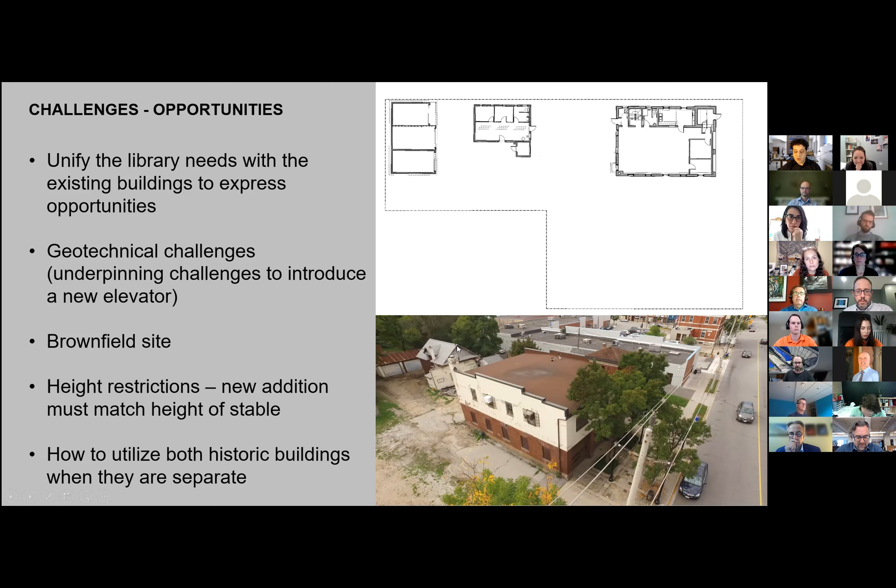From accessibility, putting in a new elevator with soils that were really unstable - we had monitoring the whole time to do that - it was a brownfield site. The Windsor Heritage Committee had imposed, and I think justifiably so, a height restriction that wouldn't exceed the height of the stable. So there were a number of challenges on how to do this.

From the design standpoint, the biggest challenge was how do you fuse these two buildings from very different time periods and materials together. After much deliberation, this is one of the sketches that resulted. You can see this is from our archival documentation, so this isn't the building as it is now, but as it was when we documented the site.

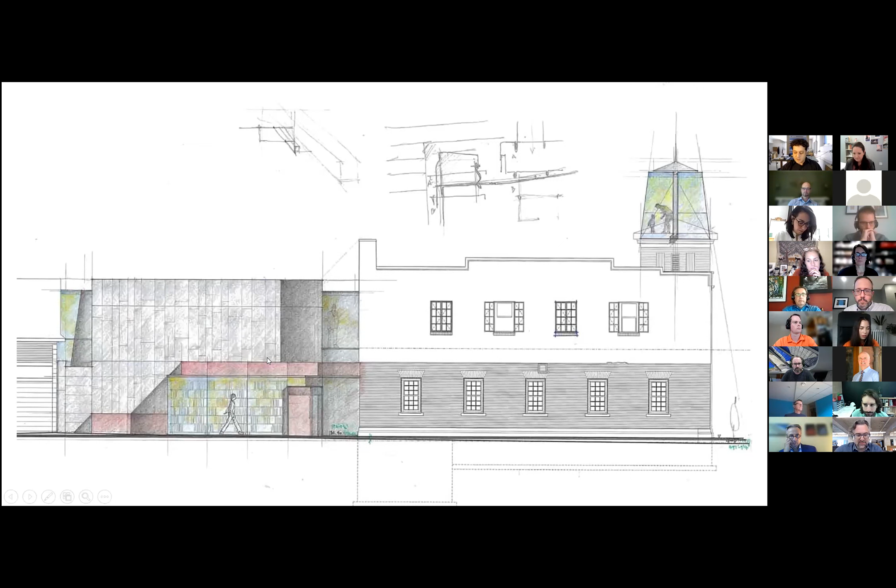I don't know if everyone's aware of that, but the intent here was to try and extend both buildings into the chasm of space, to pull the fire hall in one direction and the stable in the other direction. So the logic was to pull the masonry forward into the site, deal with the monochromatic scheme of the stucco, and from the stable standpoint, pull that polygonal geometry and extrude it into that chasm - that's what gave us this geometry of this light-filled space at the top.

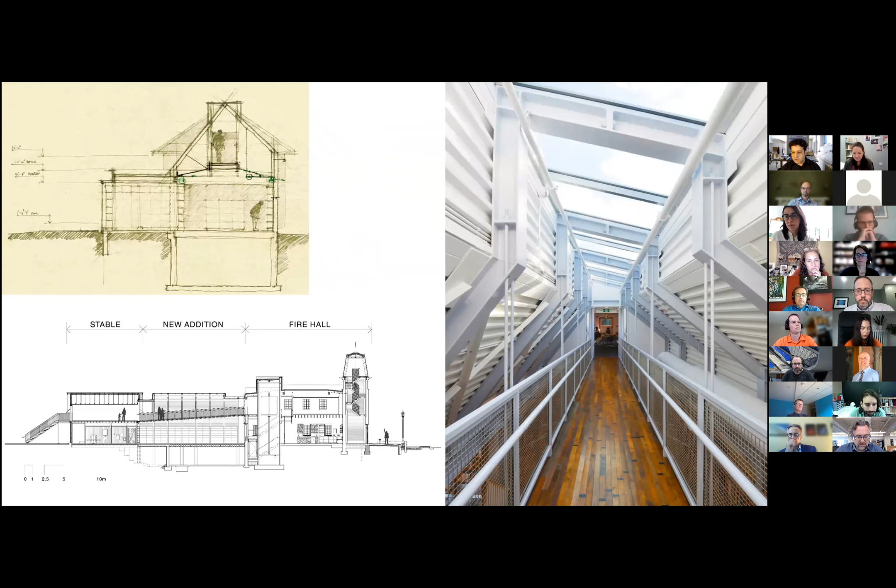As you can see here in the section, here's the stable and the fire hall, connected by this bridge that would act as a sort of light baffle for the collections below. It was about finding a language idiomatic to the two buildings that could materialize into a new structure. The other challenge was prominence, because the fire hall building was very prominent.

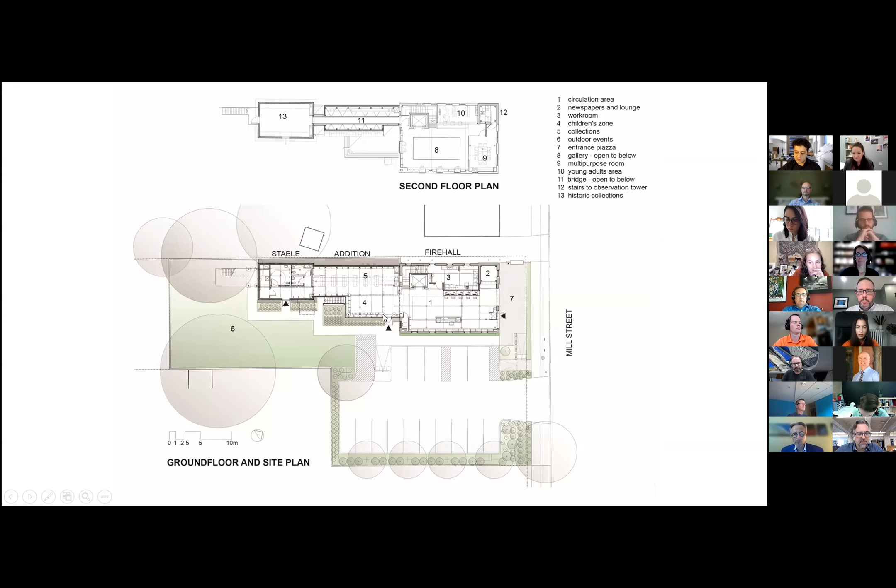The stable receded, so the geometry of the building bounces toward the stable to try and allow these buildings to speak without any dominant element. It was really a kind of balance all the way through.

I don't know if anyone knows Windsor, but Windsor is new to actually caring about heritage buildings. Unfortunately, we've decimated much of our heritage stock. This was a significant municipal project, and the decision was made from the beginning to make this a didactic project. This was the one time we were not going to hire trades from out of town to do it. We agreed to teach the local trades how to do things.

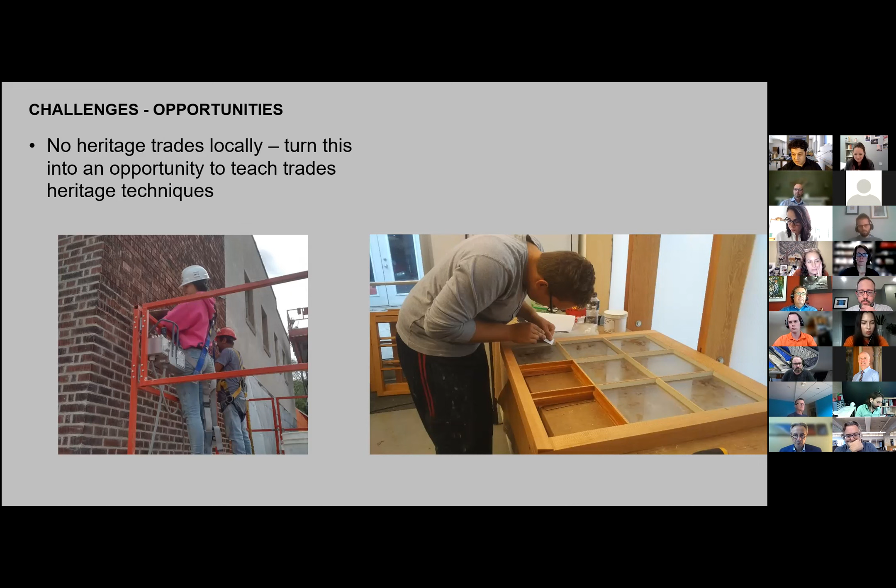This included repointing masonry, but also doing a pebbled mortar technique which hadn't been done here before, and collaborating with our carpenters at the local college, actually teaching them how to make the windows. It was myself and another architect literally there training them how to do it by hand, the same way it was done originally.

This project had projects within projects. One of those was the tower itself. As I said, there was no vertical marker or statement anymore in Sandwich, and it was really a desire from everybody in the town to bring that back in some new way. Obviously it wasn't sound, but in this case, it was light.

We have a kind of a tower within a tower project. The existing masonry, being very stiff, couldn't handle putting something on top of it, otherwise it would have to handle the same sort of stress, the wind load and such, and couldn't handle it. So the solution was really a sleeved tower within another one.

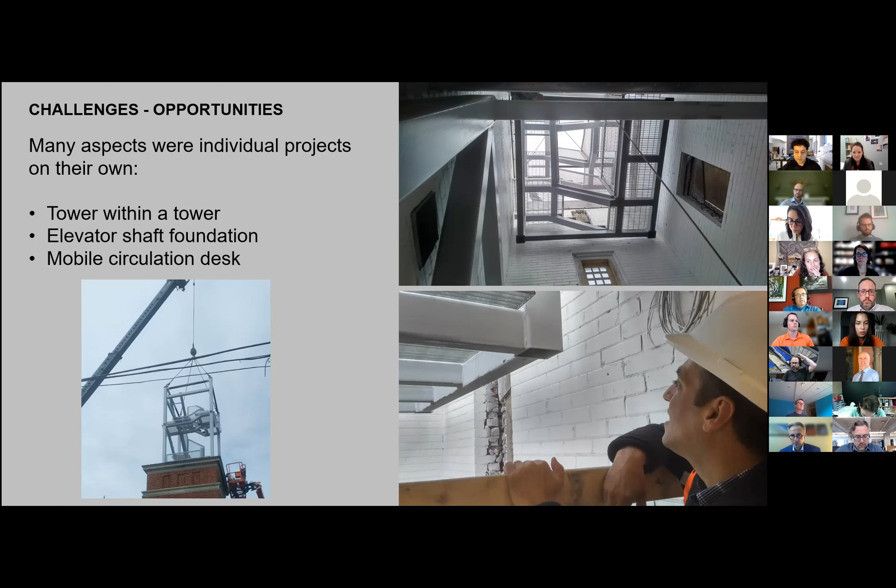The interior is what materialized: a very open, interconnected space, light filled, where from a security standpoint everybody can see everybody, but it also becomes a kind of gathering place for everybody. This space is often used for performances.

Inside the addition, we have that one piece of the library that can identify as a place for books. We did it in the children's area so it would be whimsical and fun, where the books became a sort of screen where light could come through.

And this is the sort of effect in the old fire hall. As I said, it burned to the ground on the upper floor. We were able to preserve one of the charred timbers that was hidden inside the building and expose it.

Since it's been completed, it's really been well received. It's probably the most visited, prior to the pandemic of course, library within our library system. It opened with over 300 visitors, and since we had the fire guys there, they said it was okay that we exceeded the occupancy. Since then, prior to the pandemic, we've had well over 200 visitors per day at this library, and it's this fun place that people can run around, especially the bridge.

Kids love to run down the bridge, and it's a great place for performances. So we've taken a building we're very proud of. We've taken basically something that we were really not proud of, and the fact that we hadn't done something. The city has made a statement that this is a different page turn, and heritage is going to be of significance for us from now on.

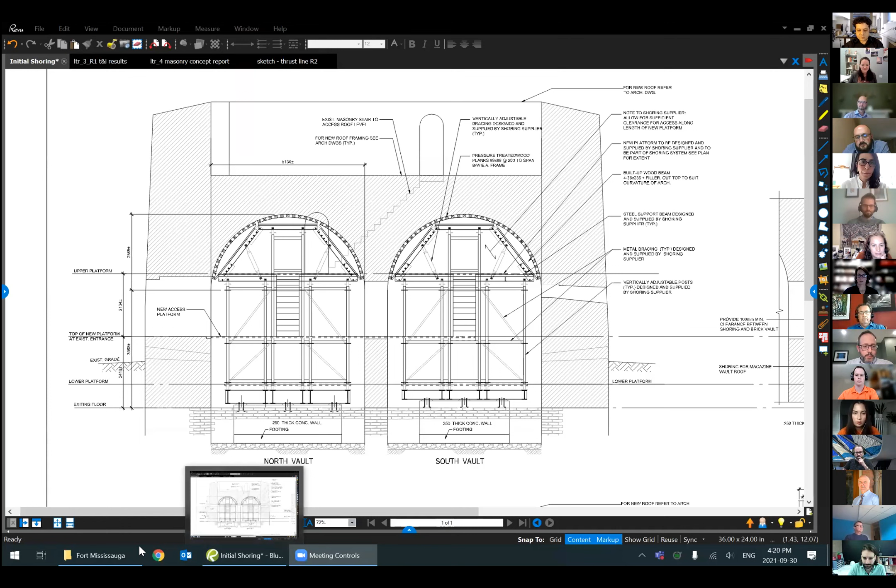In terms of context, this is a fort. I believe it's the only remaining star-shaped earthworks fortification from the War of 1812 that exists in Canada. It was built, I think, in 1814, and it's right across the river from Fort Niagara on the American side, right at the mouth of the Niagara River, where it meets Lake Ontario.

Fort George is nearby, and that's the site that's much more well known to people and frequented by tourists. This one happens to be in the middle of a golf course, not very visible or accessible from the street, but it's all quite original—a lot of the original materials are still there—and it's a very interesting site.

This is the way it was when we found it a few years ago. You can see it's actually been reclad, and they put on parging in the past. It's been reclad with brick, we believe, in the 20s or 30s. This was an active military site, certainly through World War I, and I think including World War II, where it was a parade ground for the Canadian military.

So it was fairly neglected, unheated, no windows, exposed to the elements, and a little bit forgotten about. The roof was in very poor shape.

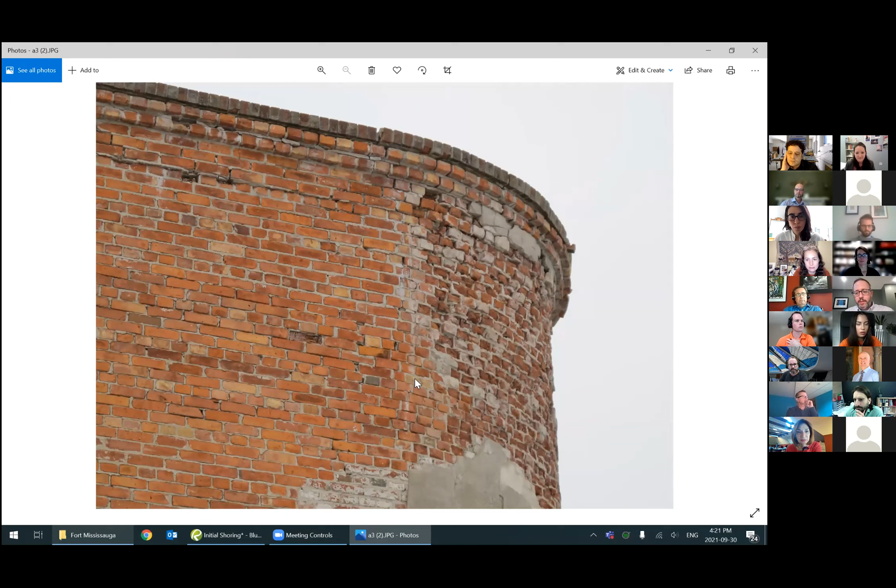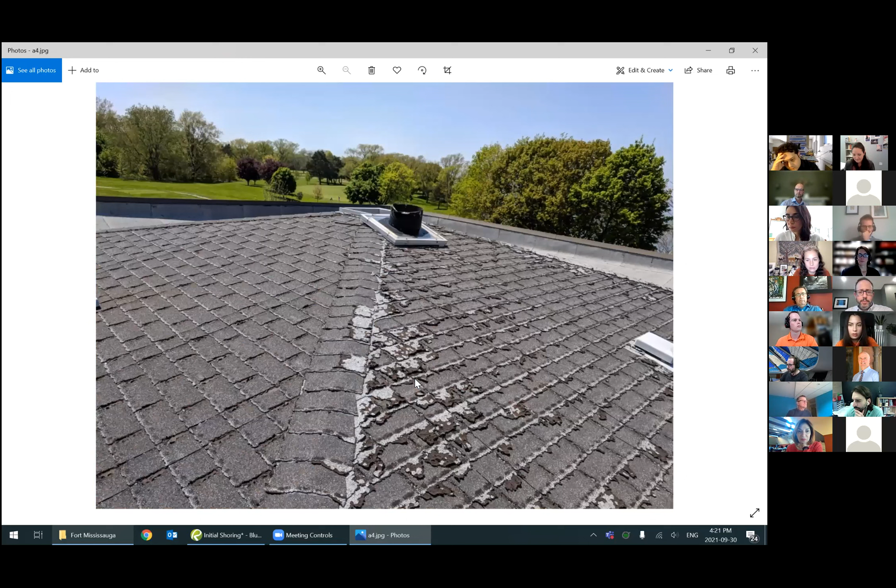As you can see, the corners and the upper courses of the brick masonry were in fairly poor condition. There's the picture of the roof—there's not a single tab left on these shingles.

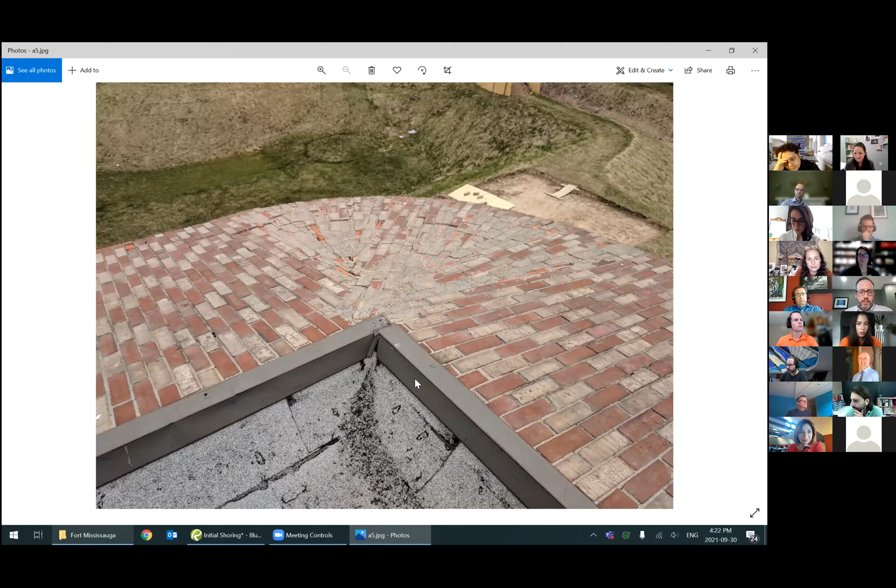And the tops of the walls—it's hard to see in the photographs, but these are 7-foot-thick brick walls with a rubble stone core, all exposed at the top.

There was a back slope on the parapet away from the top of the walls, leading to drains that went through the wall. They always froze up in the winter, and all the water was basically being poured into the masonry inside the walls.

I remember being in there to do some investigation—it had rained the day before, and it was still raining inside the building the next morning.

It was hard to get images in there since there was no light initially, but it's a fairly interesting space. From the inside, you just see there are 2 brick arched chambers, and the plaster is still hanging on in some locations.

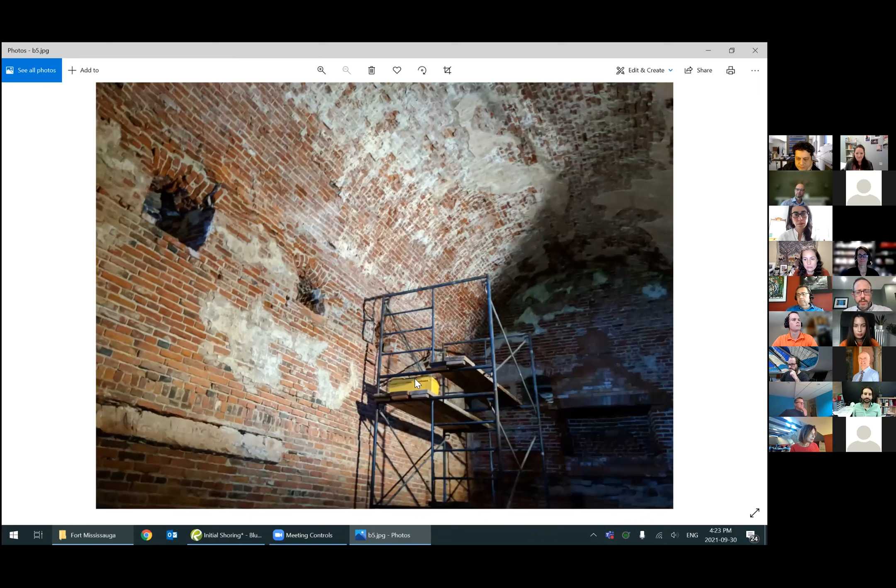But in other areas, the masonry is fairly badly deteriorated due to freeze-thaw. One example of that is along one wall where about 8 inches of brick is no longer in good shape—you can really see it where it slopes back away from the scaffolding. So, in fairly poor condition.

We were actually brought in as a sub-consultant, and our initial goal was to value engineer a shoring system. There had been 2 previous consultant teams that had gone through here, and the intent was to effectively shore the entire building.

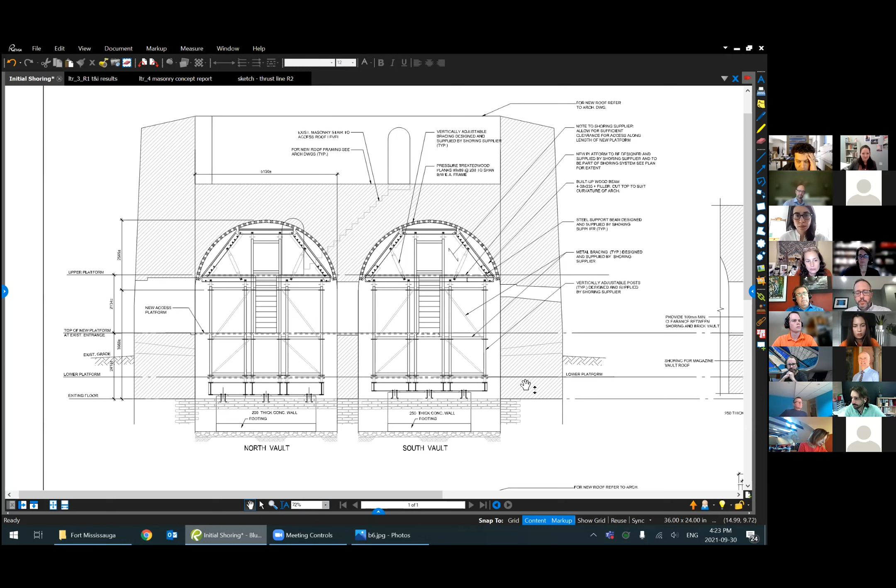You can see this is all wood lagging on new shoring systems, on concrete footings, with steel framing—quite an extensive shoring system was proposed to go in there. Our stated goal was to value engineer that shoring.

But we started out with some investigation, since based on the previous reports we didn't know things like the thickness of the arch, or what condition the arches were in, since there are 2 of them. So we set up scaffolding for investigatory openings to get an idea of the composition of the walls.

Interestingly, there was a lighthouse on this site prior to the War of 1812, and it was the first lighthouse on the Great Lakes. They believe that materials from the lighthouse, which was stone masonry, were actually incorporated into the fort—and it is a rubble stone core, so quite possible.

Since we didn't know the thickness of the arches, we cored it in a few strategic locations to get an idea not only of the thickness but also the composition. Over at the haunch of the arch, we wanted to see whether we'd come across a consistent top level for that arch, or whether the haunch was filled with brick or loose material.

We also excavated to the tops of the arch from above in the attic space, after the archaeological team had cleared it, since the floor in this space and the gun deck above are both archaeological or sensitive areas. There are some more images of coring right at the crown of the arch.

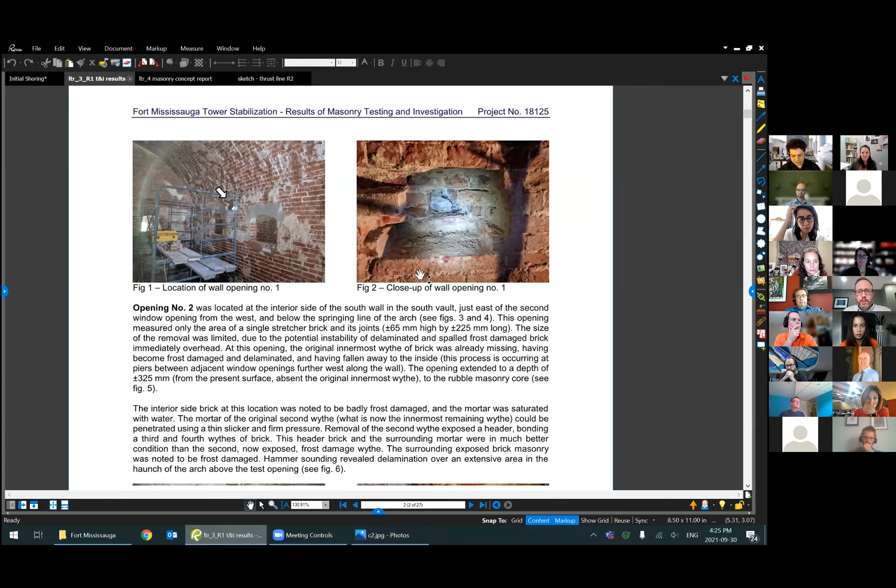So I'll just go through this. These are our, actually, this is a good one. You can see varying wythes of brick, thick to a rubble core, and that ranged from 1 brick thick to 4, and then we effectively...

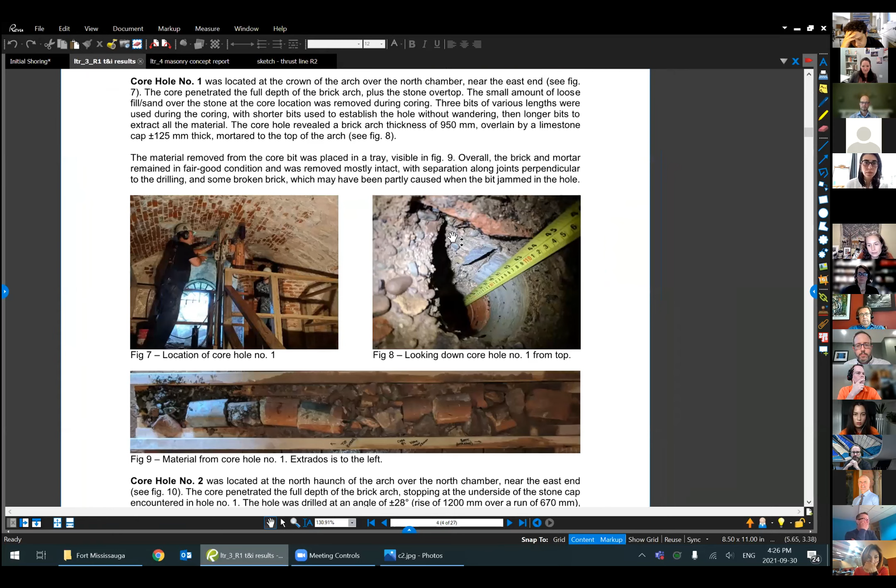Having determined this, here's an image of the core. This one didn't hold up so well. Others were better. But having determined the overall thickness, we were now comfortable proceeding with an analysis of the arch to see just how much it needed to be shored.

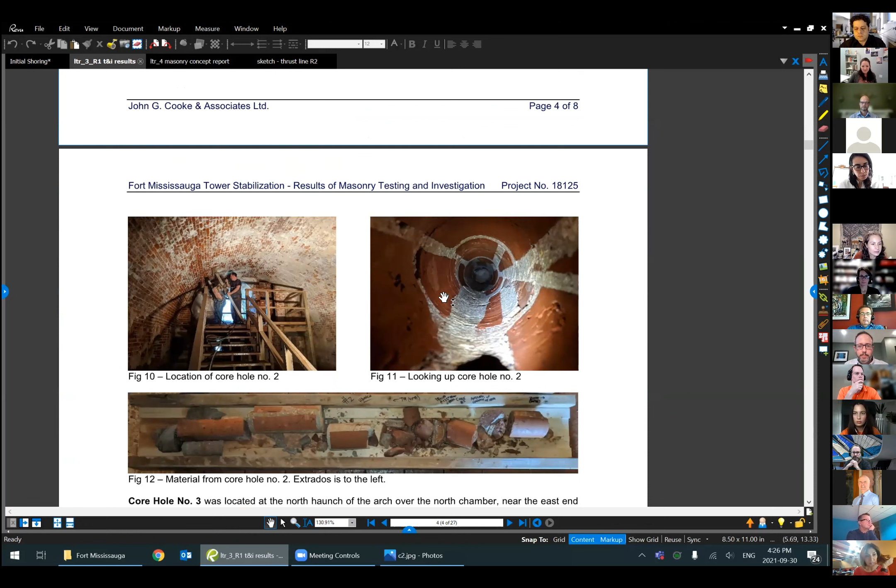Back calculating the previous design, we were able to see that they were effectively thinking they needed to shore for the entire weight. It does look quite bad from inside, but looking up the core holes, there's quite a bit of intact masonry. There's some lines, but where it's debonded, overall, not in too terrible a shape.

So this is our test pit in the attic. Anyway, from that, we tested the mortar, we tested the brick materials as well. We did a petrographic analysis on the mortar to see what the components were.

And then we moved on to analyze the arch. I don't know, in my career I haven't done this a whole lot, simply because usually arches are not, you're not using arches all that frequently as a structural element, certainly not in new construction. But even trying to rely on them in historic construction, it's not that common, at least in my experience.

But in this case, we've done a few of these, but we were hoping to really rely on this arch and minimize how much shoring we had to put in.

So what we ultimately did is we got 3D laser scanning done of the interior and exterior of the tower. And then using slices of that scan, we got the profile of the arches, and we were able to estimate how much material had been lost.

Based on our investigations, an additional amount of material we thought was fairly compromised and we didn't want to rely on. From there we completed an analysis. We did this a couple ways.

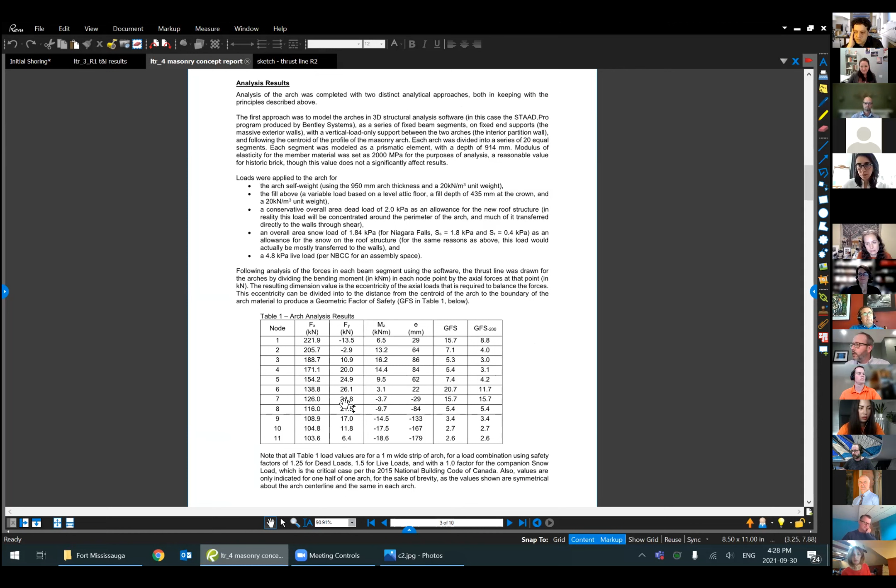There's a great book actually written by Jacques Heyman, I think his name is, called The Stone Skeleton, a very good resource if you're ever looking at arches.

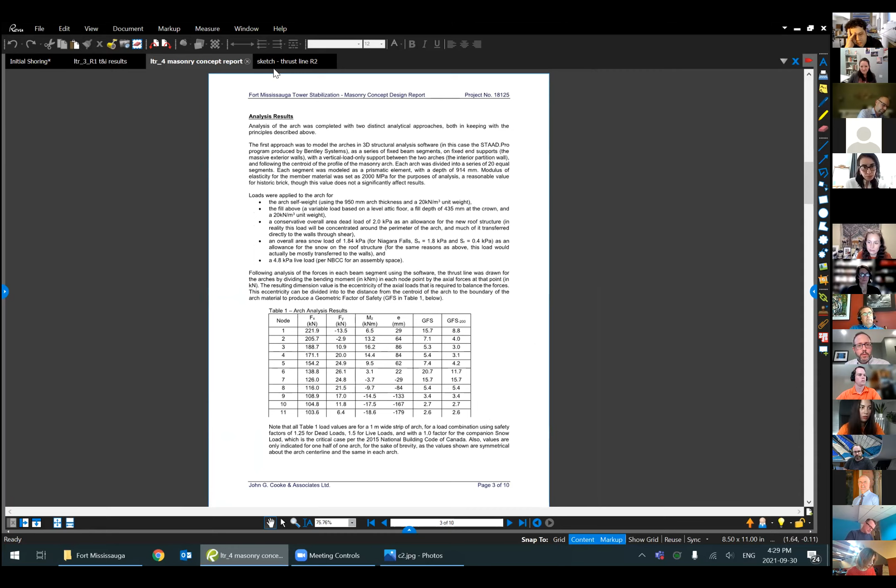But essentially what we did is we modeled thrust lines. We made models of the arch profile using beam segments in analysis software, and then we looked at various end conditions, whether fixed or pinned, or all kinds of releases, trying to cover the various boundary conditions we felt might exist.

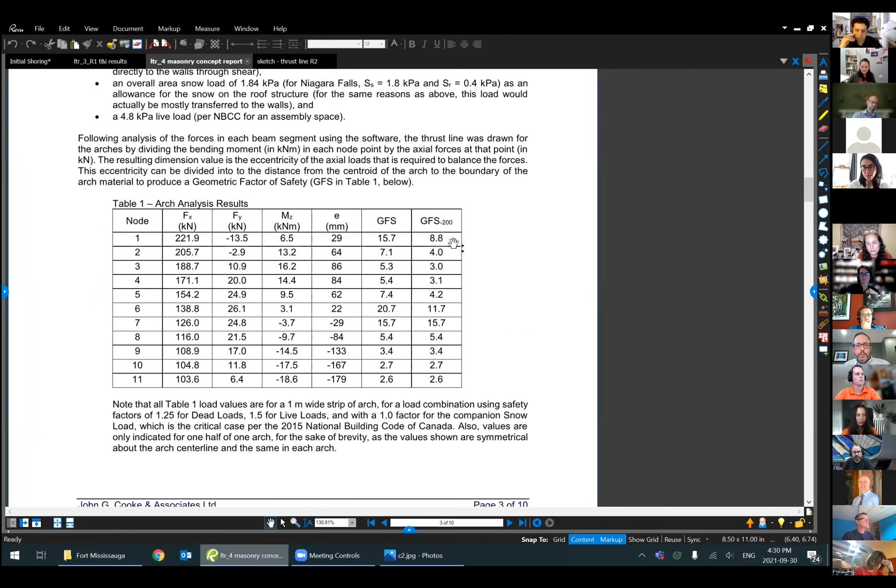So that's essentially what we did. Then, knowing how much material we thought might be missing or compromised, we calculated a factor of safety, which is what you see here. GFS meaning geometric factor of safety, and geometric factor of safety minus 200, meaning with 200 millimeters of less material.

So finally, having done that, some areas we elected to rebuild that were quite bad, other areas just very localized rebuilding of the arches, and then other areas we scaled just to try to mitigate the risk of falling debris within the space.

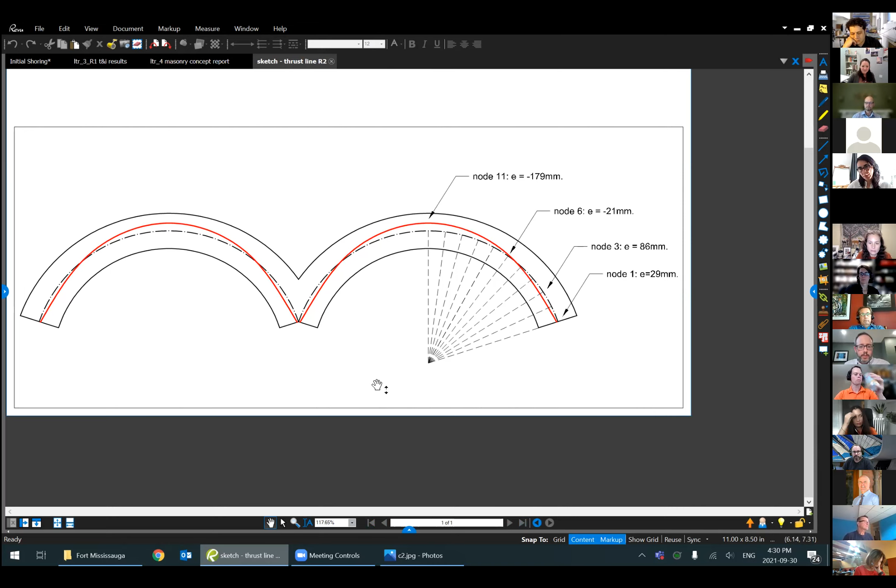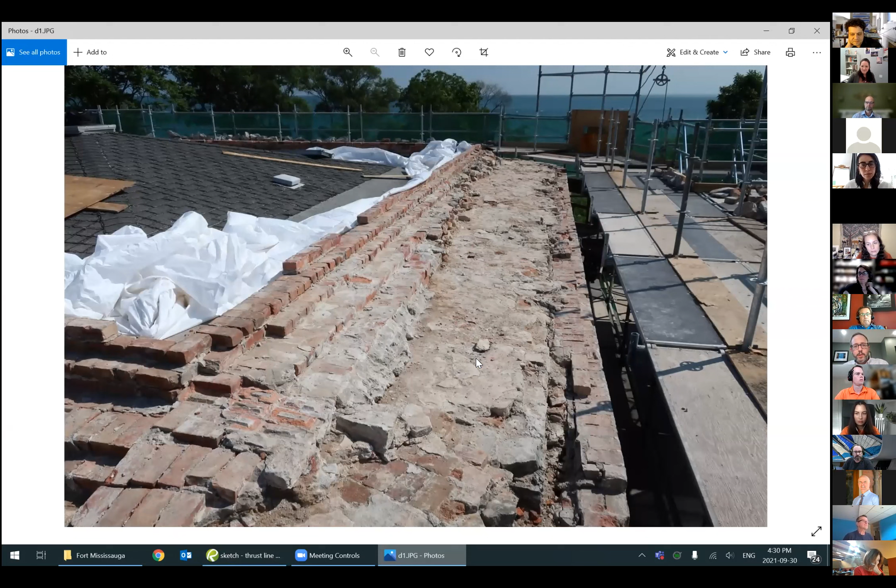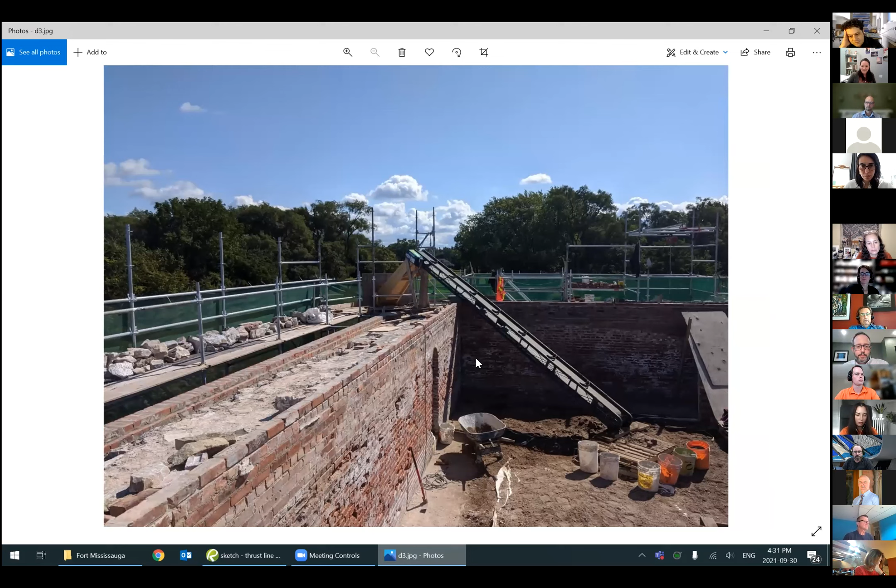We effectively reduced the amount of shoring to zero, and we got that budget, which was considerable for shoring, reallocated to masonry to suit a new roof going on the building. So all this masonry was not originally included, and we reallocated all that shoring budget to do this work, which was quite complementary to the new roof, which would go on just above it to make sure the material that would no longer be accessible was now in fairly good condition.

So these are just some progress photos. You can see the old roof was completely removed. A lot of the walls were removed down. We exposed the core. The coping was gone. We rebuilt that.

This is the attic floor, which was then fully exposed following the removal of the original roof. That fireplace is actually a hot shot furnace. They would apparently heat up cannonballs to be red hot before they'd fire them at enemy ships.

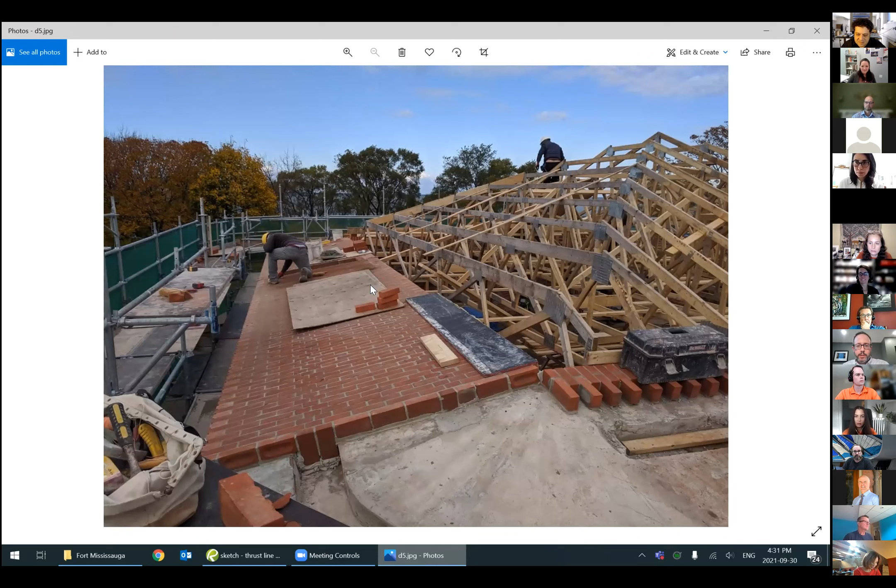Yes, this was the new roof. GRC were the architects on this, and SNC-Lavalin were the prime consultants. This roof now has an overhang, all pre-engineered wood trusses. This is the new stone or brick coping, now no longer exposed to the elements.

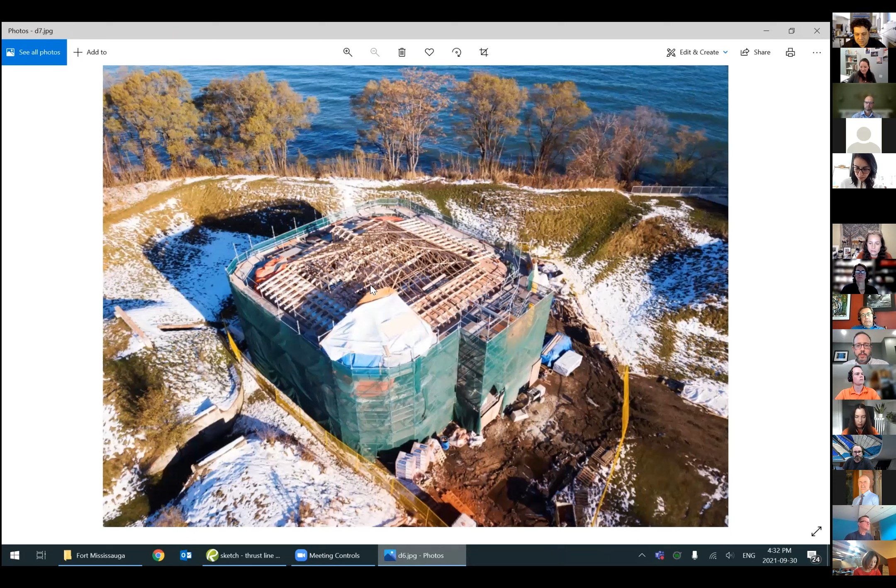Here's an overall progress shot during construction. The upper courses of brick, as I mentioned, were in fairly bad shape. They were either rebuilt with new brick or removed and reset, and often some of the salvaged brick was reset down, saved and reset on these lower courses.

And the corners as well. The corners suffered from previous drain holes through them where water was just pouring out through the masonry, so they were generally in poor condition.

And that's it. So the site there are two magazines on either side. Over here on the bottom right is a sally port, which has now been blocked off.

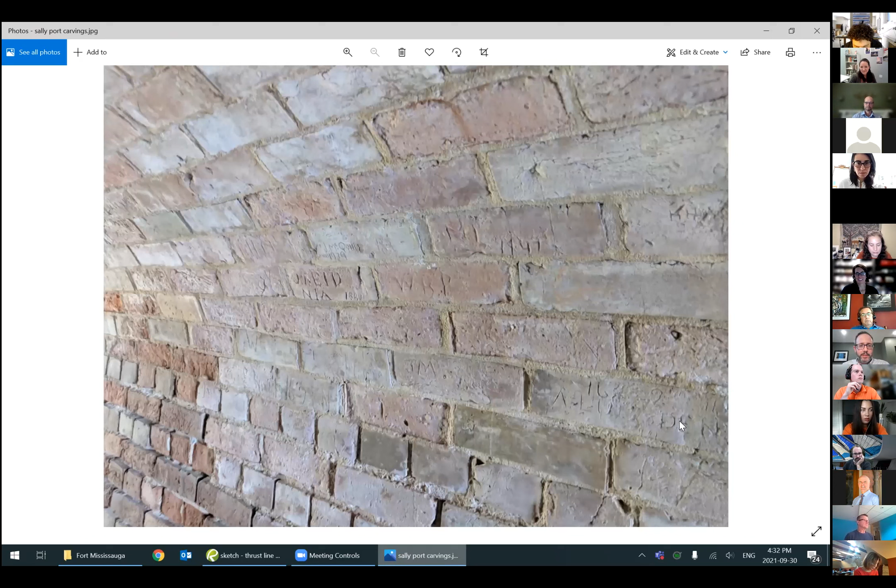Yeah, I just wanted to share this too. This is cool. In the sally port, which has now been blocked off, it's not in great shape either. This site could use a bit more attention, but it's full of old soldiers who, back in the day, would carve their names into the brick—1939, 1880—some of them had, I guess, a lot of time to do this.

And it's very neat, very cool site. I encourage you, if you're ever in the area, Niagara-on-the-Lake, to go and visit. It's quite an interesting spot, and I enjoyed working there.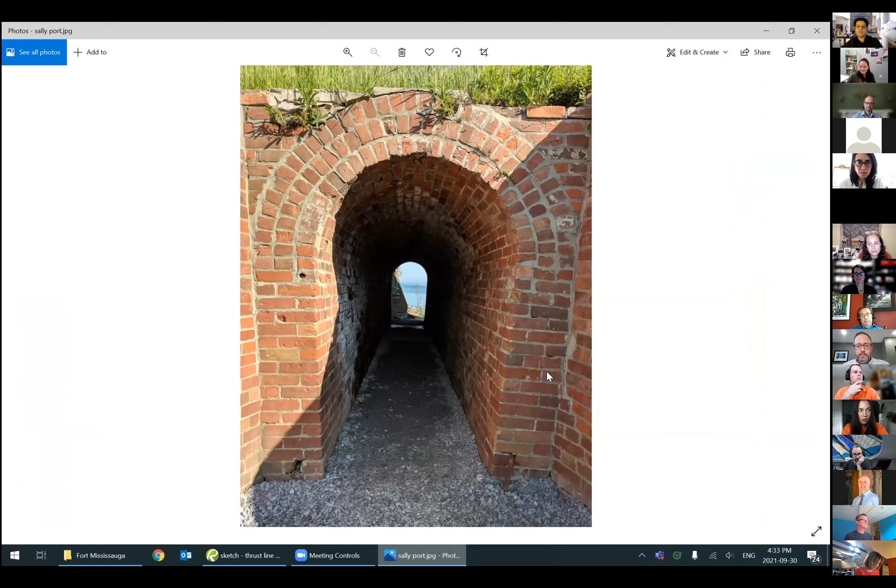I know. Thanks, Chris. Hi, everyone. I'm Ellen Kowalczyk. I'm a partner at Common Bond Collective, and we were the lead consultants for the Oakville Harbor Cultural Landscape Project. We were joined by Timmins Martell, who did the engagement component for us, as well as a land use planner, Sean Hertel, and a natural landscape consultant, Mark Laird, who was really invaluable in the project and in talking to us about the importance of biodiversity in the area.

So the long title is a result of a larger initiative that the town of Oakville has around cultural landscapes. For a number of years now, they have been identifying potential landscapes, evaluating them, designating them under the Ontario Heritage Act, and creating conservation plans for them. So they're really, really leaders, I think, in this field in Ontario, and we are very happy to be working on this project for them.

So cultural landscapes might not all be familiar—their definitions or what they are. In Ontario, we do define cultural landscapes. The provincial policy statement does talk about them as defined geographical areas that have been identified as having value to communities, particularly Indigenous communities. But there are other, less operational ways to think about cultural landscapes—places where ideas and practices are embedded. So a cultural landscape approach to places is really about understanding how the environment has shaped us and our use and our activity, but also how human beings have shaped our environment.

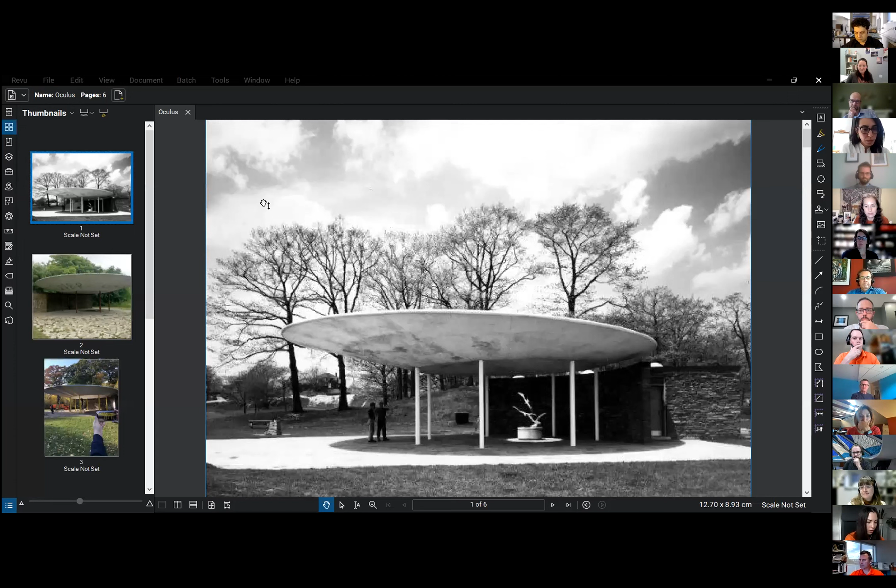Okay, perfect. So I just wanted to give a little bit of a brief on the Oculus. The South Humber Park Pavilion, located along the Humber River Trail, also known as the Oculus, is this wonderful modernist park pavilion, also called Space Age Park Pavilion.

The Oculus was designed by architect Alan Crossley and engineer Lawrence Casali. It was built in 1959 in a time of ambition and optimism, and was also part of a generation of park pavilions that were built in the 50s and 60s and can be found throughout the city's park system.

Over the last few decades, however, the Oculus was suffering from neglect and deterioration and was even threatened by partial demolition. So in 2019, the Architectural Conservancy of Ontario, the ACO, and JIMO received the Park People's Public Space Incubator grant to restore the pavilion and also reactivate it as a community hub through events and public engagement programs.

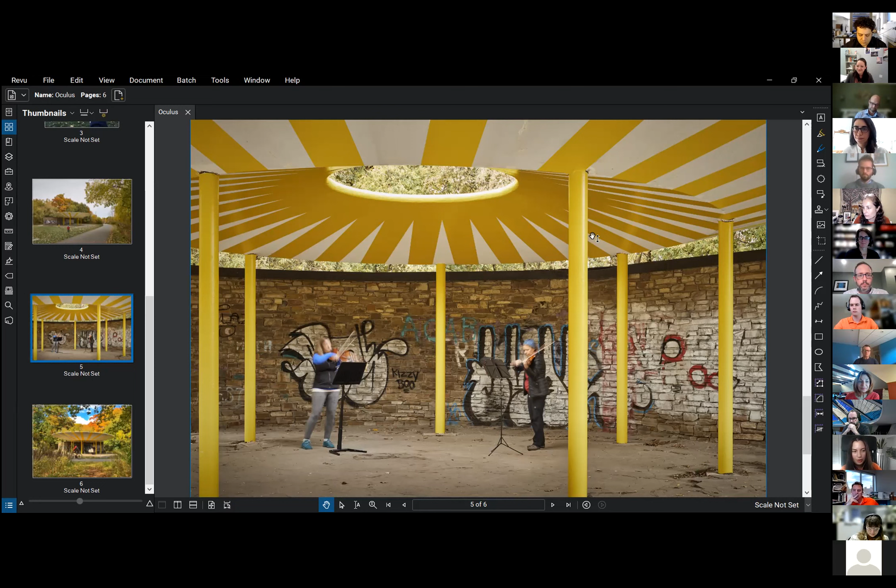Thank you, and first I want to thank Chris and all the organizers today. I'm really grateful to be here. It's very exciting, especially among such wonderful projects. They're all incredible. Jason in particular, I love to see the capacity building in a conservation project—it's really great.

Which kind of leads into my thesis, which is about those kinds of trade skill shortages. I was looking particularly at Toronto, and I looked at heritage policy and economic frameworks to try to understand why heritage tradespeople aren't seeing the same kind of growth and opportunity that seems to be available to heritage professionals. So really, in a way, the research is less about the trades work itself as it is about policy and the economic tools that the heritage sector has to support that trades work.

Going through that, I found that there are tools that exist. Sometimes we talk a lot about intangible heritage and how we don't have the structures for describing heritage value or the designation tools to make that kind of work a priority. In fact, there are tools available at policy levels in Toronto, and also provincially and nationally, to support heritage trades work, as well as some economic tweaks that could be made within the system as it stands.